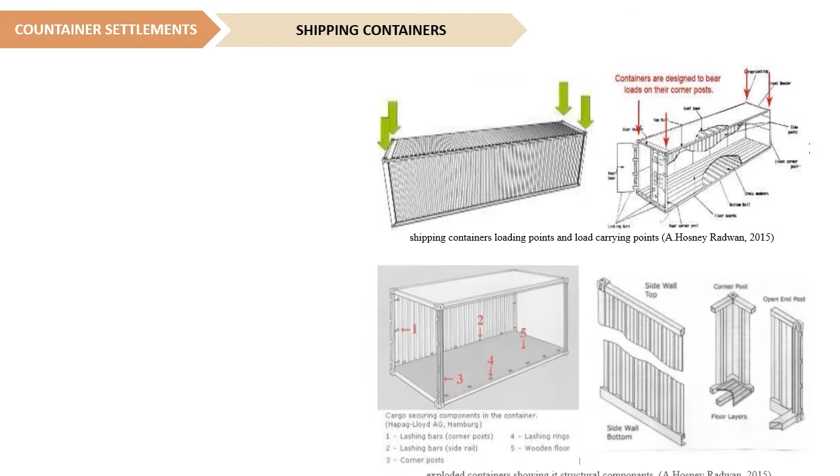Container settlement using shipping containers. The first picture shows shipping container loading points and load carrying points. The second one shows the structure and its components.

The container is a construction made of steel, built to carry a load and support the weight of loaded cargoes in transit, with the strength of its system. The containers are fabricated to be reused constantly.

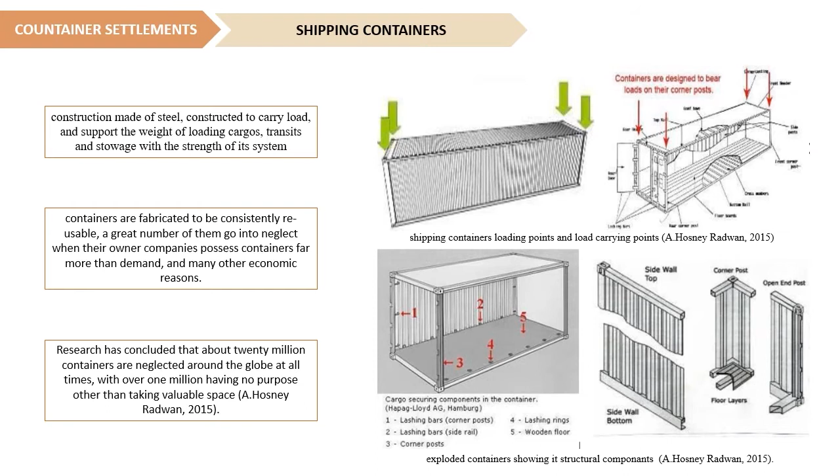A great number of them go into neglect, where their companies possess containers far more than demand, or for other economical reasons. Researchers have found that about 20 million containers are neglected around the globe at any time, with over 1 million having no purpose other than taking up valuable space.

As for shipping container architecture, the use of sea containers in construction can lead to significantly lower prices, especially if the design is budget-based. This makes the architecture more affordable.

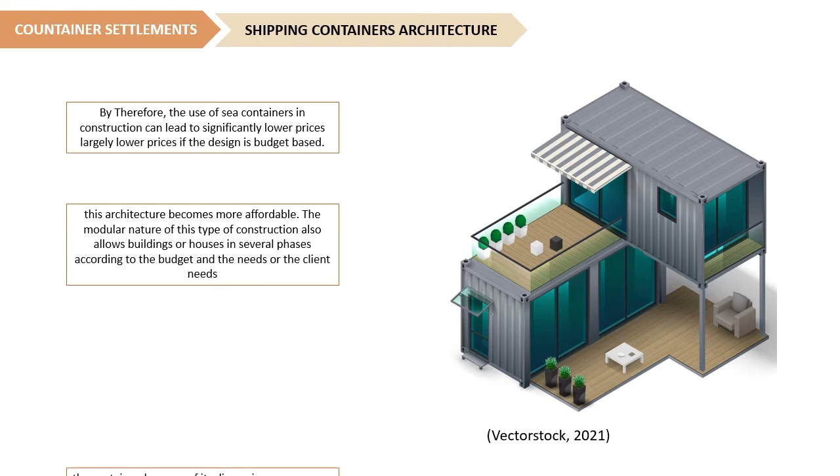The modular nature of these constructions also allows building houses in several phases according to the budget or the client's needs. The containers, because of their dimensions, constitute a space, a room characterized by its uniformity.

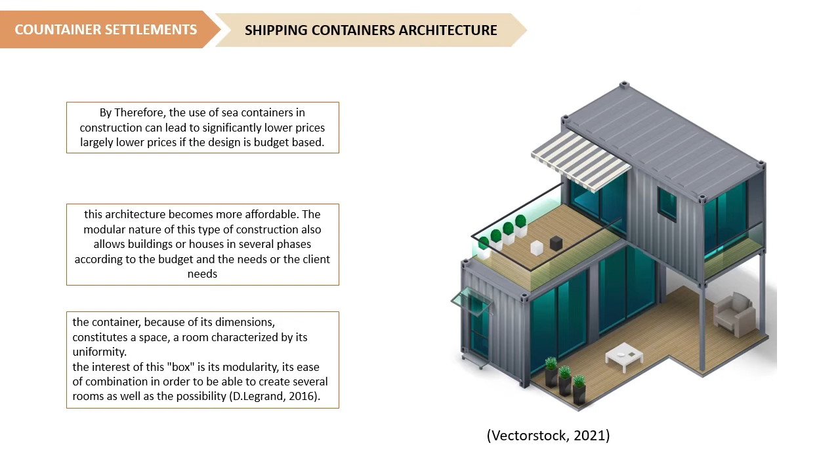The interest of this box is its modularity. It eases combination in order to be able to create several rooms.

To understand eco-container architecture, some projects done around the world will be presented as examples. The first example is the single house container, Port-a-Bach.

This project was built in 2007 with a single container by Atelier Workshop 17. It is a container of 20 feet, about 6 meters, perfectly in line with the New Zealand tradition.

It is designed to accommodate a family of 4 people, characterized by flexibility, mobility, and environmental quality through its low impact on the site. It is energy independent for 48 hours thanks to its solar panel installed on top. It also has terraces and natural ventilation.

The second project is the Collective Housing Container Project of London. The Container City project is one of the most symbolic and most accomplished examples of container architecture, built in 2001. It is a set of 12 second-hand 40-foot containers stacked on 3 levels.

This set of red containers was made in 3 months and installed in only 4 days, with each unit corresponding to a dwelling and a work studio for an artist.

The characteristics of the space: it is flexible, mobile, having 80% recycled materials, sprayed insulation, vapor barrier, and plasterboard panels on the walls and ceilings to improve the acoustic and thermal performance of the shipping container.

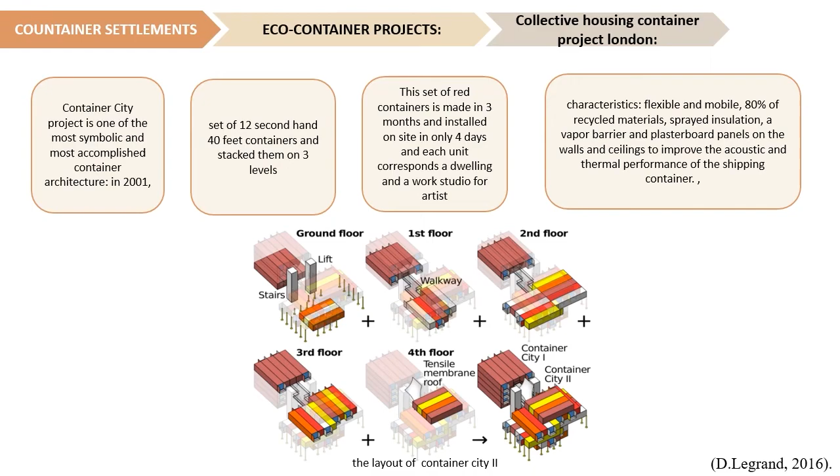The third project is a facilities project, Keetwonen. In Amsterdam exists Keetwonen, considered the largest university campus and biggest container settlement in the world, made of maritime shipping containers. It is composed of 1,000 units stacked to 5 levels high, composed of 12 different building blocks of varying length.

The characteristics of the project: flexible, mobile, with inner courtyards located between buildings providing plenty of bicycle storage. In addition, all the units are designed with balconies and small separate gardens for the units on the ground floor.

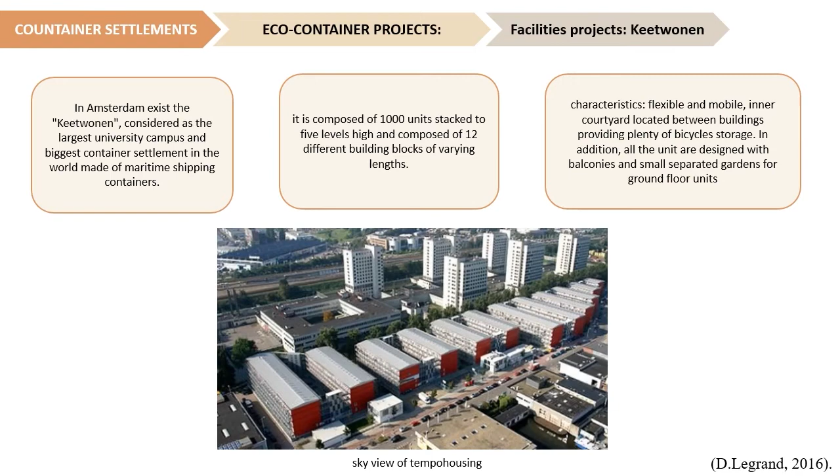As we understand from the previous examples, sustainable eco-containers can be a good way of creating new housing settlements, urban places, and facilities. For the current situation in Mosul, a sustainable new settlement using eco-containers can be a good solution to solve the problems of the city.

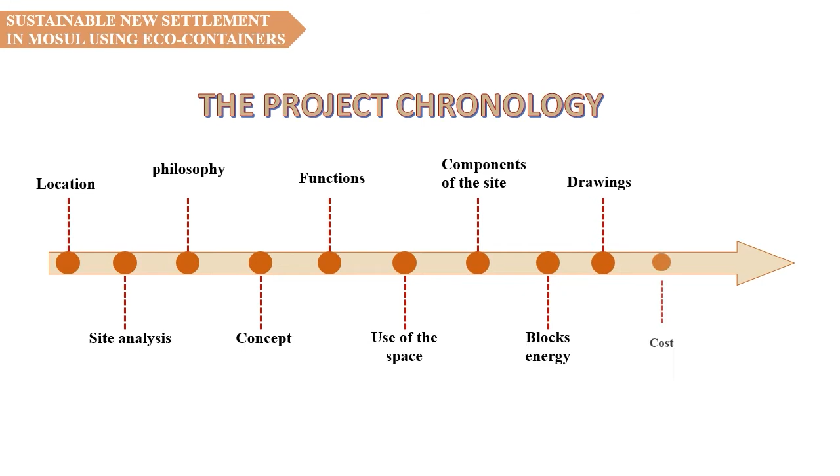The project chronology will start with location, site analysis, philosophy, concept, functions, use of the space, components of the site, block energy, drawings, cost, and then SWOT.

The project will be located in Iraq, specifically in Mosul, and more specifically in Mosul Forest. Mosul, together with the nearby Nineveh Plains, is one of the historical centers of the Assyrian people, with great importance, background, and location. It is located approximately 400 kilometers north of Baghdad, 165 kilometers east of Syria, and 75 kilometers west of Erbil.

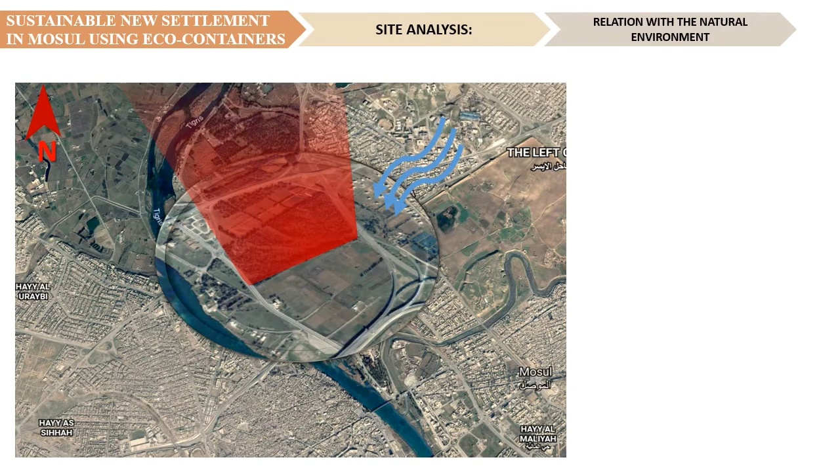The sun rays, sun path, and then the dominant wind.

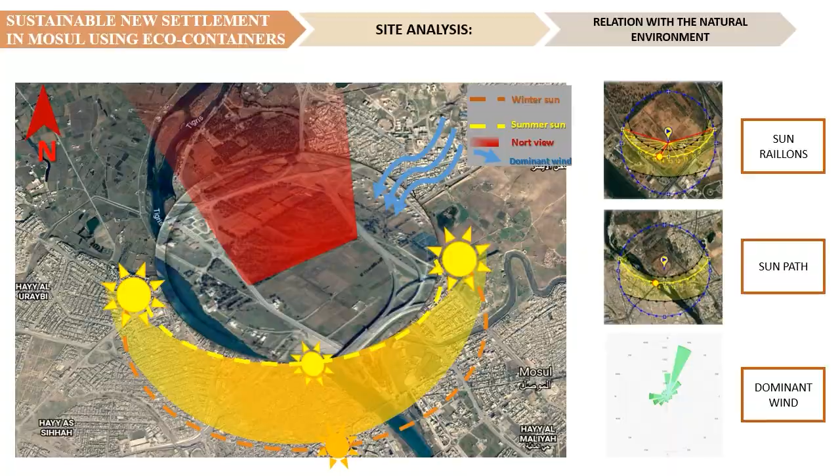Relation with the surroundings: the site is located in a great location between the forest, which is agricultural ground, and then Mosul city, the new one, then the old city, and Mosul Park, then the river.

The philosophy of the project: the idea of having a settlement especially designed for refugees highlights the fact that the term refugees was never related with the period. The idea is having a land for refugees that can be a great potential and benefit for the city of Mosul in diverse contexts.

First, being a great example of container settlement in Iraq. Second, a great example of ecological settlement. Third, a good energy potential for the city. Fourth, being an important node as a diverse activity open space, like having some squares, plaza, gardens, and forests. And finally, a great agricultural potential place.

The shape of the city was designed following the traces of the old plan of Baghdad city as a reminder of the old history of the country.

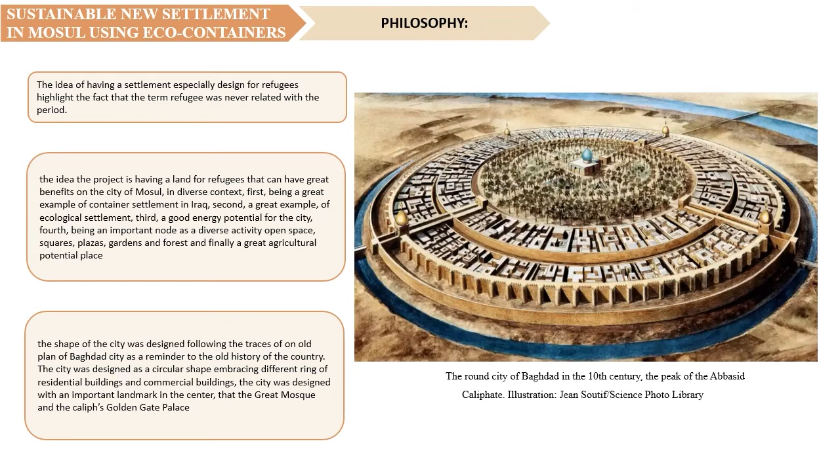The city was designed as a circular shape, embracing different rings of residential buildings and commercial buildings as well. It was designed with an important landmark in the center: the Great Mosque and the Caliph Golden Gate Palace. These are some ideas that were applied to the project.

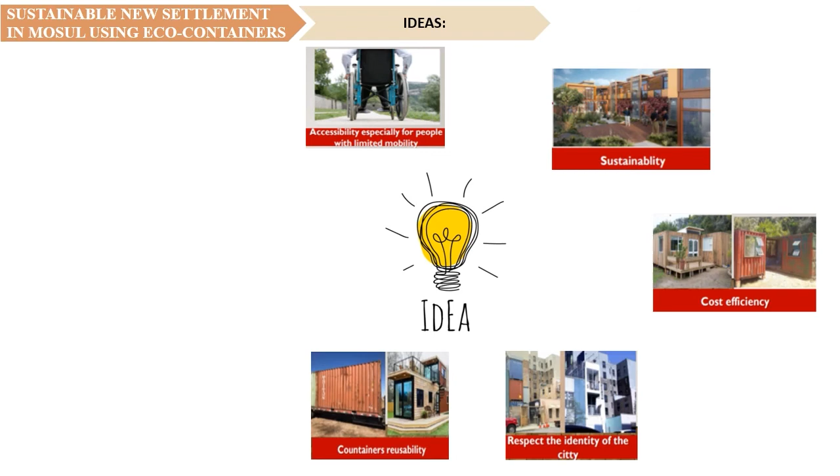First, the accessibility, especially for people with limited mobility, then the sustainability, cost efficiency, respect of the identity of the city, container reusability, and site flexibility.

The concept. The main concept of the project is summarized in the balance between different contexts. The main balance is between history and future, bringing some specifications, characteristics, and identity from the past to a future time with modern strategies.

The project will be a balance between designing open spaces, closed spaces, and semi-closed spaces, between new settlement and modern town, between traditional local materials and modern materials, and finally leisure, working, and the concept of the site.

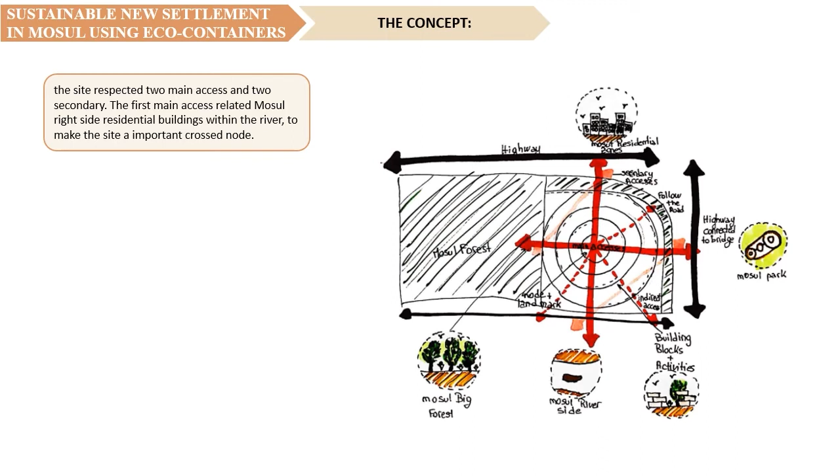The site respects two main accesses and two secondary ones. The first main access is related from Mosul right residential building parts within the river, making the site like an important crossroad.

The second main access is connected from Mosul Park to the Mosul Forest as a way to connect the existing potential within the new created activities. The first secondary access is related to the upper highway to the forest, and the second secondary access is connected from the second highway to the river.

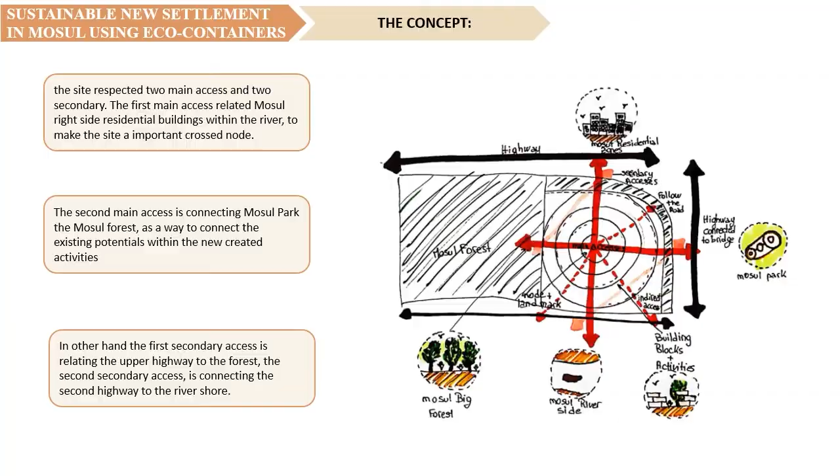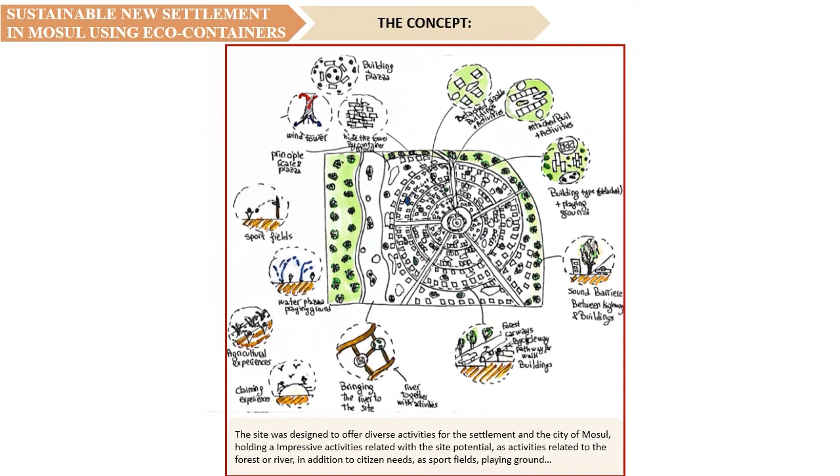Always with the concept, the site was designed to offer diverse activities for the settlement and the city of Mosul, holding impressive activities related to the site's potential, like activities related to the forest or the river, in addition to citizen needs like sport fields and playing grounds. The roads were wide, holding bicycle paths, car parking, and sidewalks.

As for the center of the project, it was a wind tower, which is a landmark for the project. It is an ecological concept and landmark covered by structured containers standing on top of each other and flipping like a tower to cover the wind tower.

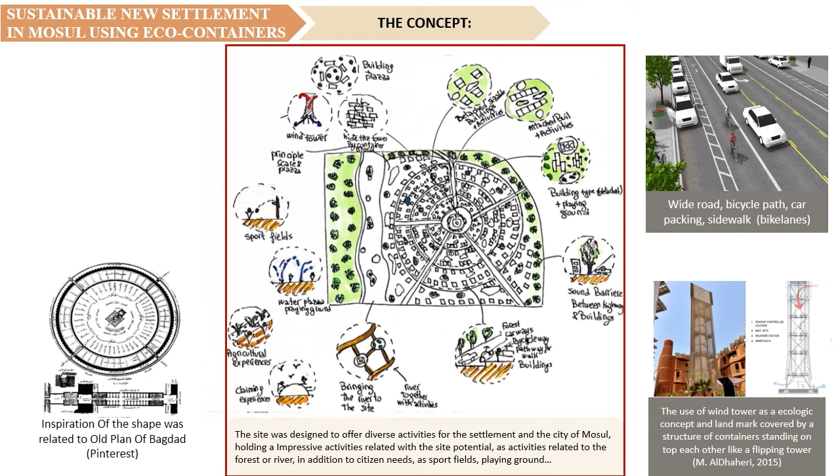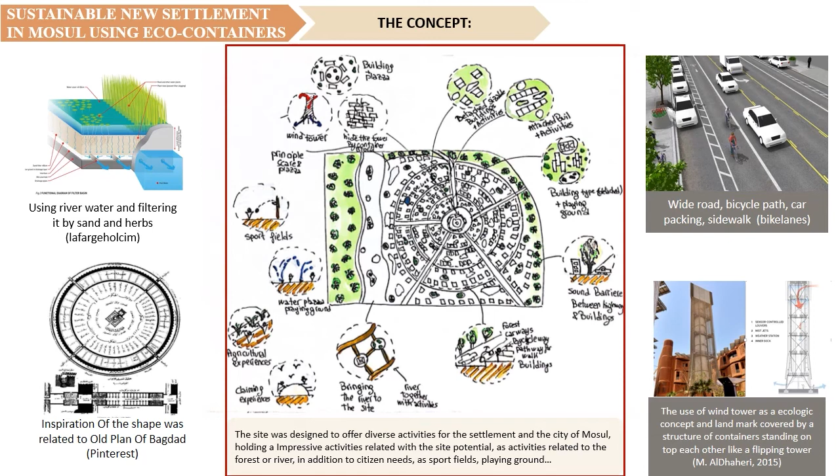As for the shape, it is inspired by the shape of the old city of Baghdad. The use of water within the site involved bringing the river inside the site, using river water and filtering it with sand and herbs.

The functions can be divided into two parts: main function and secondary function. If we consider the settlement as a location to live for refugees, the main functions will be residential, commercial, governmental, and religious, and the secondary functions will be learning, culture, sport, agricultural, leisure, and similar.

From another perspective, the function can be categorized as closed and open activities, which leads to designing the local spaces and blocks following the instructions of the activities and functions.

If we discuss the disposal of functions, we can see from the figure that it follows the specific context of the land, creating central functions and a landmark, then distributing main functions around, then merging them with secondary functions in an equal way.

The use of space: as we can see from the diagram, the land covers a surface of approximately 403,655 square meters.

The use of land was manipulated to have the maximum of building blocks, while the land is already located near the forest. It is not too important to have some extreme huge green areas. The 42% of the open spaces, that means 170,000 square meters, include only a small part of the forest that will be used for agricultural leisure activities.

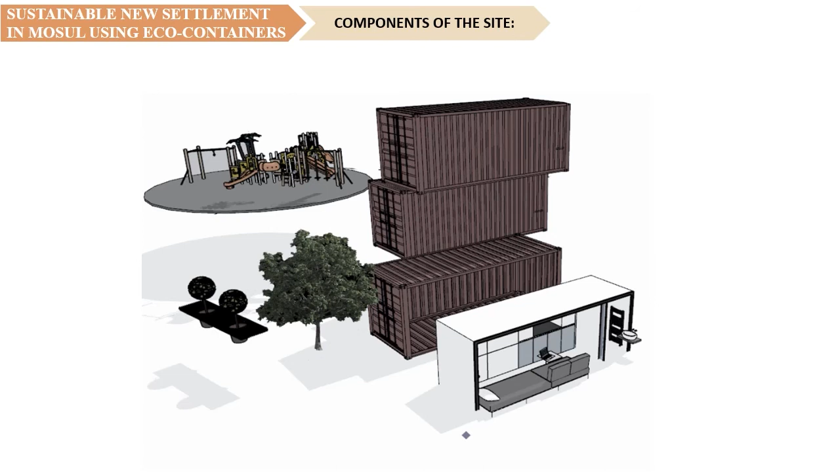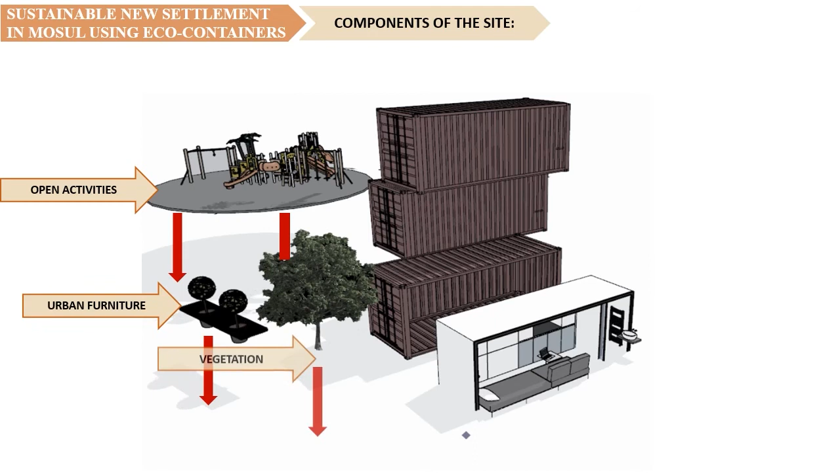Component of the site: we can consider that the site is formed of 5 different components. The first, open activities like parks, skateboarding places, some sport fields, etc. Then urban furniture, vegetations, superposed blocks, and then indoor space.

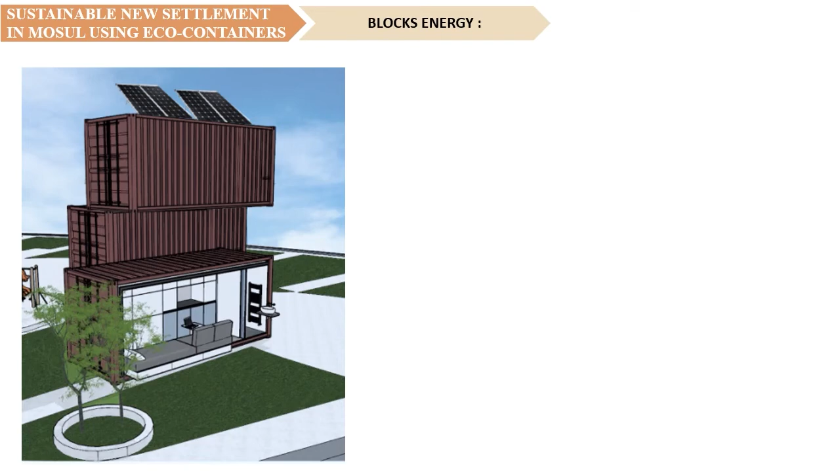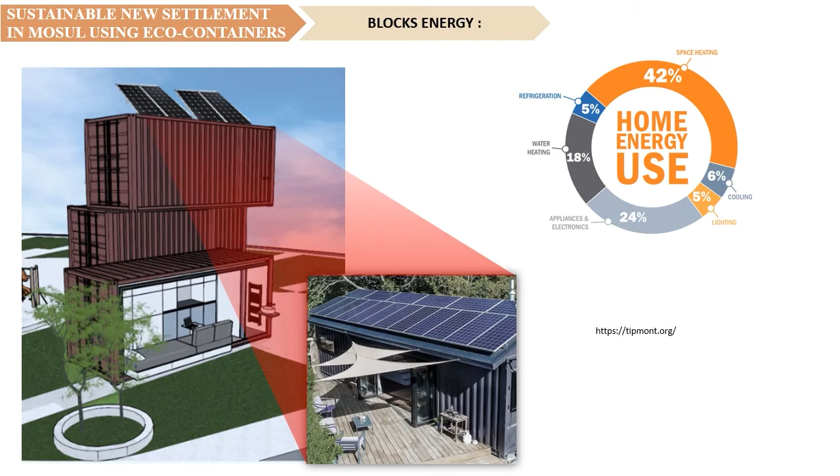As for the drawing, the site plan. We can see that the site plan gives some different structures, different types, and also some different types of open space. If we talk about the building types in the project, type 1: the building is made of 6 containers of 40 feet that give a total area of 168.

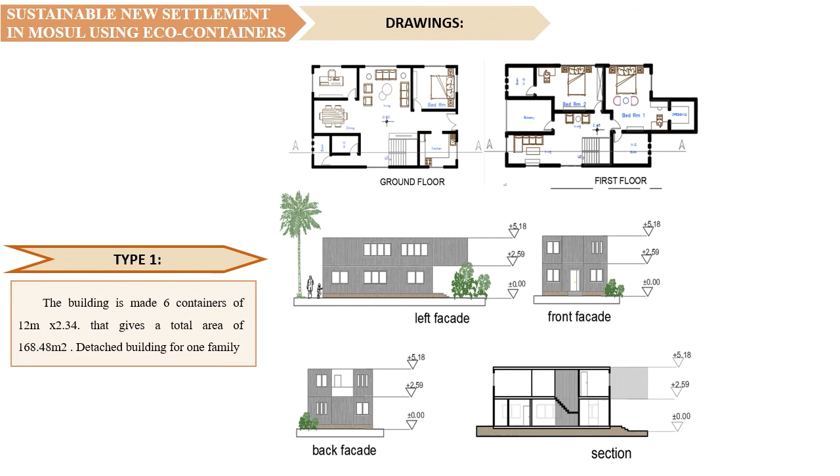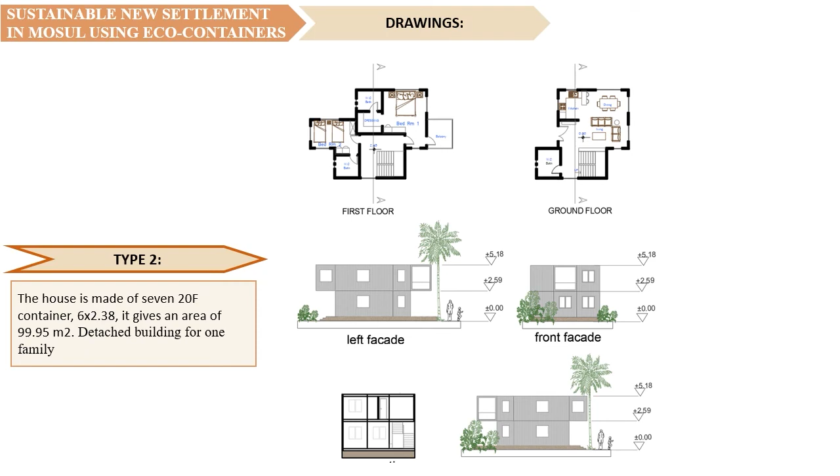It is a detached building for one family, standing on two floors. As for type 2, the house is made of 7 containers of 20 feet. It gives an area of 99 square meters. It is also a detached building for one family, standing on two floors.

As for the third type, the building is combined of 15 containers that give a total of 428 square meters, standing on 5 floors. It is a collective attached building.

Type 4: the building is a combination of 27 containers from different sizes, with a total of 554 square meters, standing on 4 floors. It is a collective.

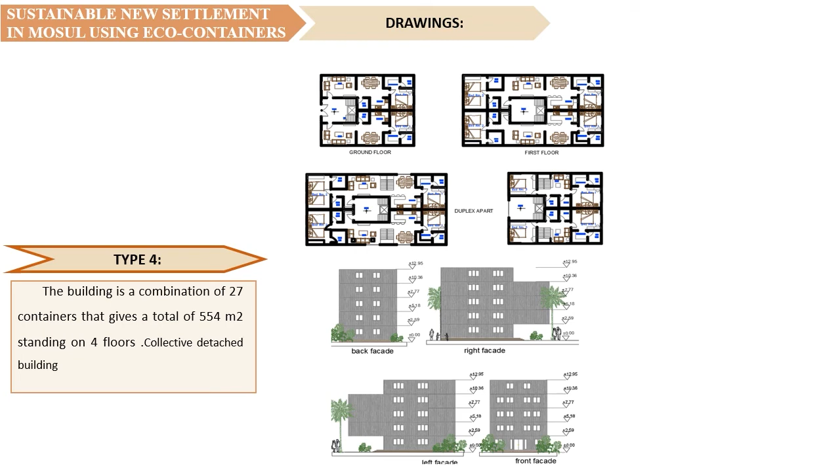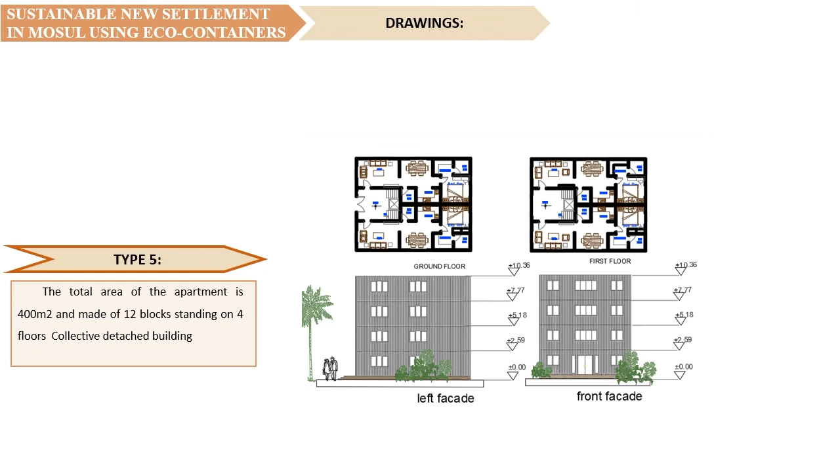Type 5: the total area of the apartment is 400 square meters, made of 12 blocks standing on 4 floors. To understand the cost of the project, this example was exhibited as a comparison between traditional house construction costs and container house cost.

The example is a one-story small apartment with 1 bedroom, 1 bath, 1 kitchen, and 1 dining room, having an economical finishing container to decrease the price of the estimation. It covers a total area of 35 square meters and is covered by 2 units of 20-foot containers.

If we consider the house as a traditional house construction, it will cost $14,875. And if we consider it as a container house, it will cost only $11,250. Hence, you save over 32% when you use prefab containers in this scenario.

As a result, in relation to the project and also considering this example, the land is embracing 8,400 diverse-sized container blocks. If we consider a margin of error of 15%, we can say that the cost of the project will be $75 million for a number of up to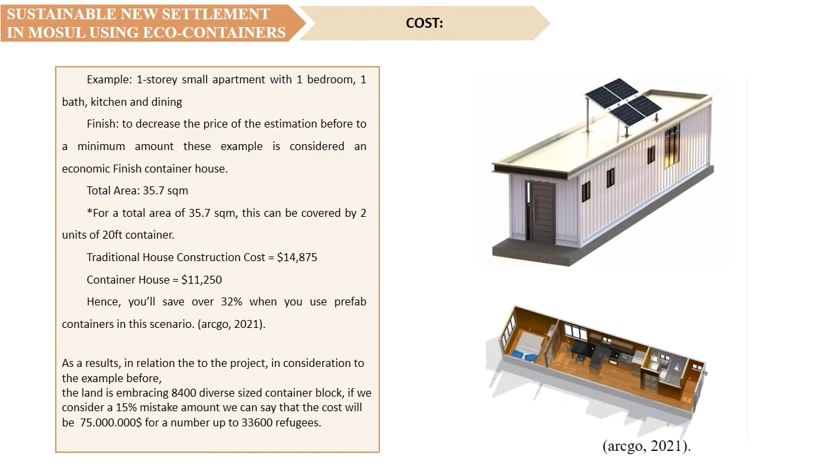33,600 refugees. If we talk about the SWOT analysis: the strengths are durability, adaptability, easy to build, flexible, carries heavy load, and also fast to build.

If we consider the weaknesses: still need building permits and building codes. Not all the constructors and laborers can do this kind of project. The labor hourly prices are so high.

And if we consider the opportunities: it is warm in winter, cooler in summer, transportable, renewable, less expensive than traditional buildings, and fast to build.

And if we consider the threats: new containers are expensive, old containers can create problems sometimes, and the container house life is less than the traditional one.